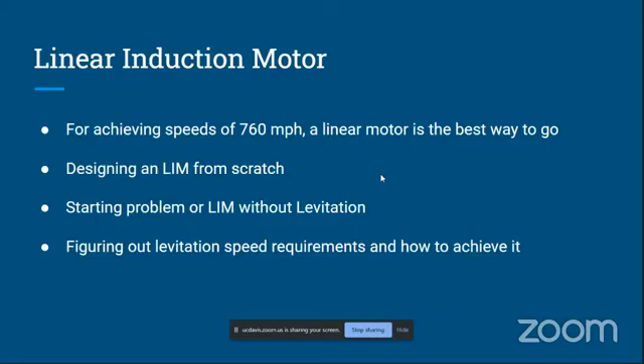The first issue we had to tackle was the levitation requirement for contactless propulsion. Our levitation system, which will be discussed, is designed to lift a pod of 400 kg at speeds slightly higher than 10 meters per second, that is 22 miles per hour. But to reach that speed, we have decided to use a LIM. We initially were working with the idea of double-sided LIMs, but eventually landed on single-sided LIMs for our first prototype.

We are using double-layer windings and three-phase high-voltage AC from a custom inverter, which should handle the high-voltage DC input of about 700 volts from the battery pack. It should also have high frequency to decrease the size of LIM needed to propel the pod. So mounting of the LIM on the chassis has to accommodate the complex wiring and the air gap requirements, and these details are being worked out in collaboration with the structures team.

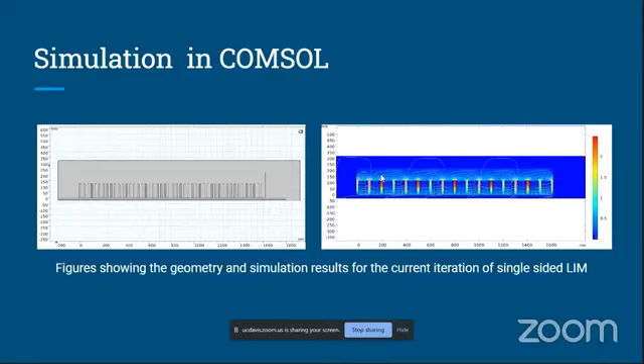Now, coming to the levitation system, which does the job of levitating the pod. This is an important step because this reduces the drag on the pod, which in turn can improve the speed. The system requirements of levitation are as follows. It should provide a stable levitation, that is, the air gap fluctuation should not be high. It should be cost-effective, fail-safe, and wear-resistant to minimize maintenance costs.

So, considering these points, we chose the permanent linear Halbach arrays to do this job. One of the main reasons is its passive nature. Hence, it's completely fail-safe, along with requiring zero power. Now, coming to the relation between levitation and propulsion. The vertical air gap variations would result in fluctuation of thrust by the LIM, hence these are to be minimized. The levitation system should have little drag and high lift-to-drag ratio at all speeds, so that the propulsion system need not waste power countering the drag.

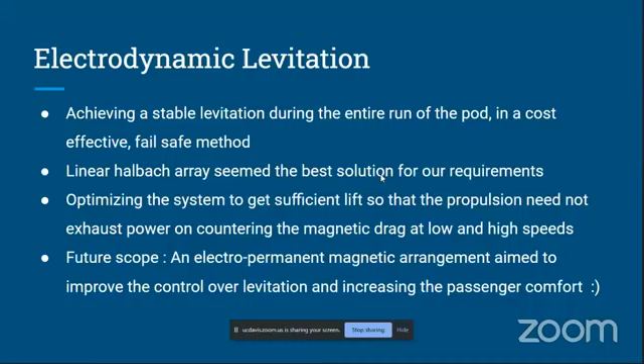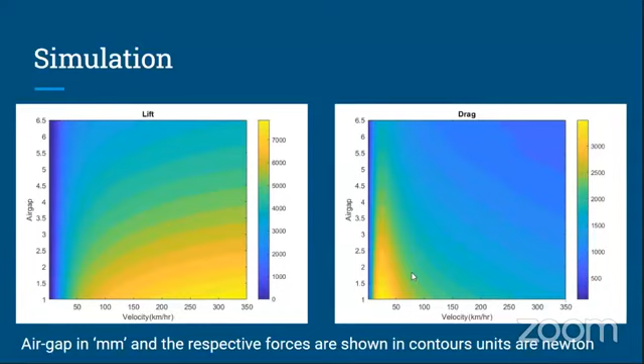Next up, we have electrical dependencies. So a complicated propulsion system like this requires a power system which is designed for safety, workability, as well as dependability. So the onboard power supply comes from an accumulator system of 15 packs with 13 LFP pouch cells in each. Thus, maximum voltage is 712 volt, and a DC-DC converter ensures stable 12 volt supply.

This powers the propulsion system as well as a control system which helps to communicate the pod state outside, as well as ensures that all the onboard computing gets all the sensor data properly. For electrical safety, which is a major priority, we use a shutdown circuit which is controlled by certain signals defined as system critical signals, and we have PCM-based cell cooling for all the cells.

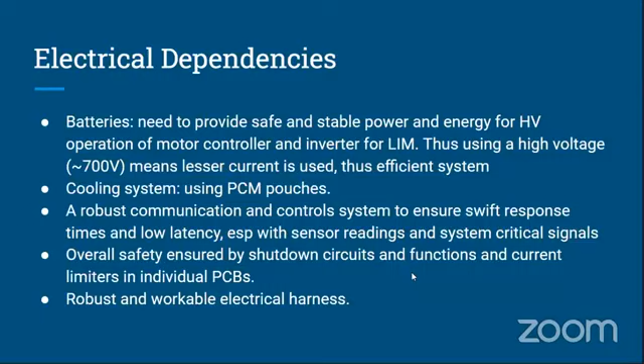Thus, this concludes a short insight into Hyperloop IITB's pod system, and thank you, and feel free to reach out if you're interested.

Okay, so would you like to continue presenting or would you like me to? Oh, go ahead. Take the floor. All right, awesome. Sounds good. I will share my screen. Okay. There you go. All right. There you go. Backwards. Okay. Can you all see my screen? Hello? Okay. Yeah, we can see it.

Awesome. So our three leads, Aaron, Jason, and Michael, unfortunately can't be here for the LIM. So I'm just going to go over how our LIM works. So in the past, we used cold gas thrusters, which is recommended by Elon Musk, and we did quite well. This year, however, we are planning on using a linear induction motor. They have been proven by maglev trains, which are used widely throughout the world, and they're likely the best option for a longer track. So while cold gas was a very good option for a shorter track, we're moving to a LIM this year.

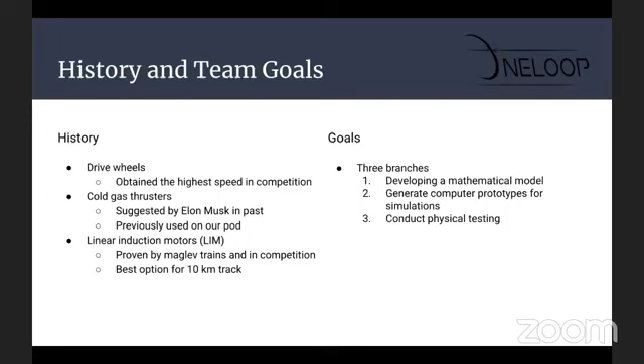So unfortunately, due to COVID, we can't really test in person, which is unfortunate because we need a test drive. So we're probably going to get to testing in around September when our new facility opens up. We will obviously have social distancing enforced. But right now, our main plan for the future is get some physical testing done.

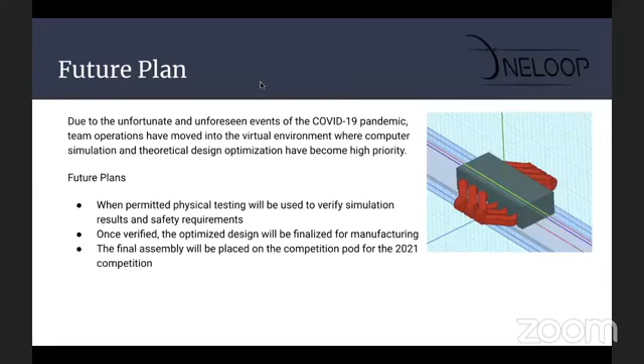So the way our LIM is working for now, and we're fairly certain we're going to stick with this plan, is we're probably going to use a DLIM. So it's a double-sided LIM. This allows for more lateral stability in the pod. We're also planning on using the LIM as brakes, possibly. We have a separate braking system, and we're considering possibly using the LIM in complementary fashion to the brakes, or possibly just as brakes on their own.

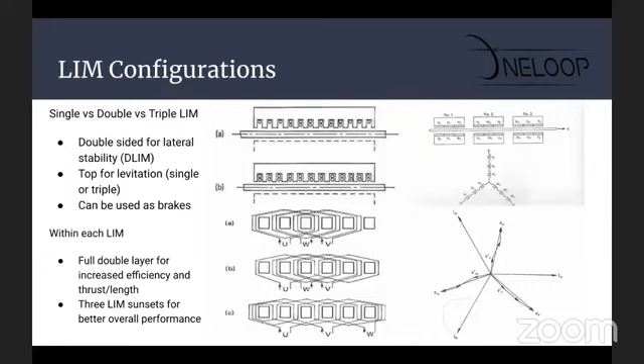Within each LIM, we have a full double layer, and we have 3 LIM subsets for better overall performance. Again, we're still working on the more technical details of the LIM, but in our simulations, this is what has come out as likely the best and most efficient system for our linear induction motor.

So we decided to use ANSYS for our simulations. This is because it's widely used among professionals and professors in the industry. And we have 3 main ways in which we're testing our LIM. We're using ANSYS, we're using mathematical models, and we're supposed to be using physical simulations, but we can't really meet in person. So we're really just using ANSYS and mathematical models at the moment.

If you attempt to use ANSYS at any point on your pod, we recommend testing the mesh to find an adequate level of accuracy and reducing difficult geometries. One of the biggest challenges we faced in ANSYS, other than the fairly steep learning curve, is that it tends to take a while to run.

And we as a team only really have our laptops. We're looking for high performance computing solutions, but right now we're still using laptops of our team members, and we have to compromise on the mesh. Obviously, we want to be as accurate as possible, but this can take up to over a day to run.

So the testing overview. Testing is probably the most interesting to those of you who are, well, unless you're very much interested in ANSYS like I am. But we have a lot of testing that we're planning on happening in the future, probably around September and later on. Then we have a test stand. We have a dynamic test stand which we're hoping to use. We've used it in the past.

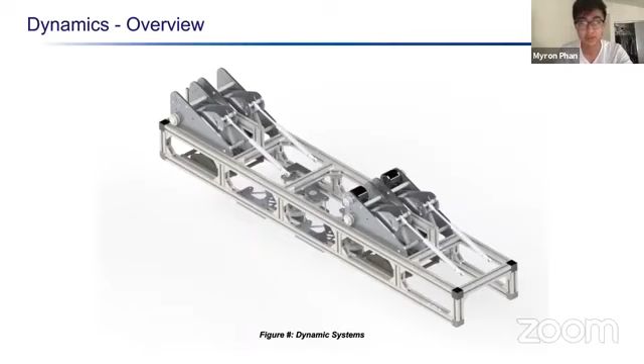So first, we'll be introducing a little bit of our propulsion. This year we decided to switch up to a gearbox design, which is a lot different than what we usually go for. We saw that most of the top teams usually went for either a LIM or a gearbox design of some sort. We felt that a gearbox design was more feasible at our scale. So that's what we decided to go for. And we will have DJ introduce that.

So just going over the layout of everything, in order to reduce costs, we ended up mirroring as many components as we could in the topside stabilization and the propulsion. So you can see this topside stabilization. We have 2 of those units and 2 propulsion units that go at the top of the flange of the I-beam. And then we have 4 underside units to go underneath the flange of the I-beam to clamp, and then 4 lateral stabilization units to keep the pod centered on the I-beam.

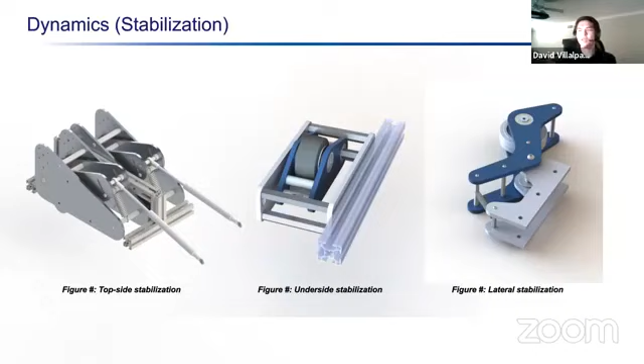And to go into detail with the propulsion, in order to keep it compact and costs within our budget, we're using a dual motor system with skateboard motors, 190 kV rating, and a pulley belt system in order to drive the drive wheel. We're also using tension springs as suspension and dual directional dampers.

The unit's intended to be mirrored to reduce the number of unique parts that need to be manufactured and just reduce our overall cost. And it's also meant to be modular, so this whole thing can be removed with about eight bolts. So that way we can easily maintain and adjust things, adjust pre-tensioning on things.

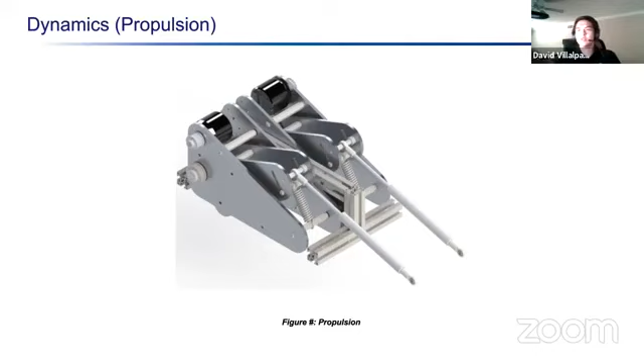As for performance, we haven't actually been able to get in the lab and manufacture due to current events, but our best estimates are that on the 20 meters of test track we have available, we can reach approximately 8.9 meters per second, which is about 20 miles per hour. So that's our propulsion system. Thank you.

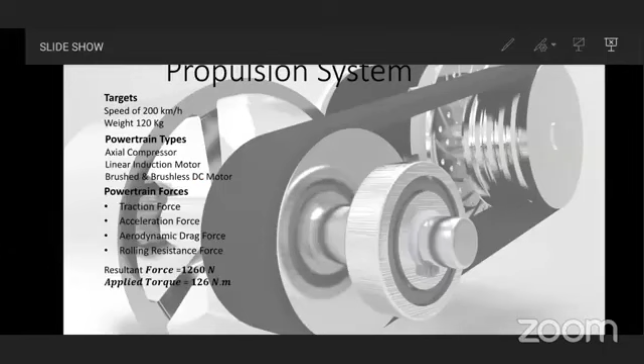Is it clear? Yep, hello? Is it clear? Yeah.

I'm Mohammed Hisham, propulsion system designer at Hyperloop. First, our targets for the year were a maximum speed of 200 km/h, and our weight to be 120 kilograms based on calculations of the whole team's systems weights.

In the selection, we had many choices: axial compressors, linear induction motors, or brushless DC motors.

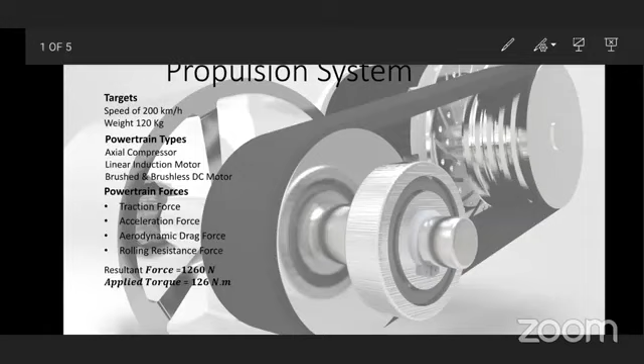For the powertrain forces, we calculated traction, acceleration, aerodynamic drag, and rolling resistance forces. The total force was 1,260 Newtons.

Depending on the considerations of the selection, including cost, lead time in the season, availability in our Egypt markets, and SpaceX competition rules, we selected the brushless DC motor with 82 kilowatts.

Our motor specs were 5,000 RPM and 140 Newton meters, and the transmission ratio was 1.2.

For our driveline selection, we considered cost, simplicity of the system, RPM and torque, and we selected a belt drive for the driveline.

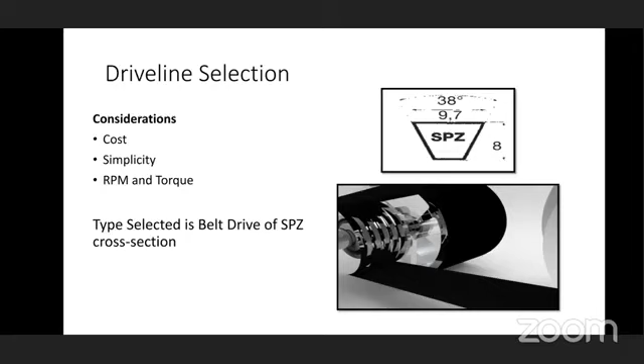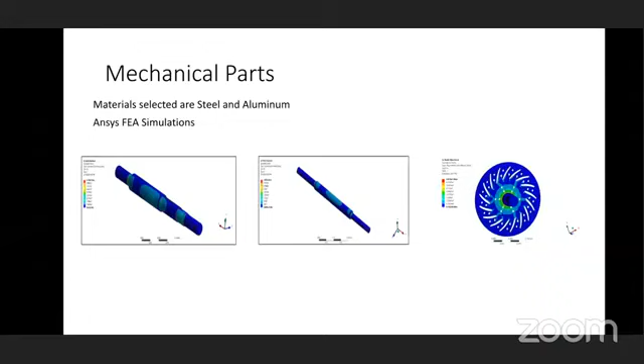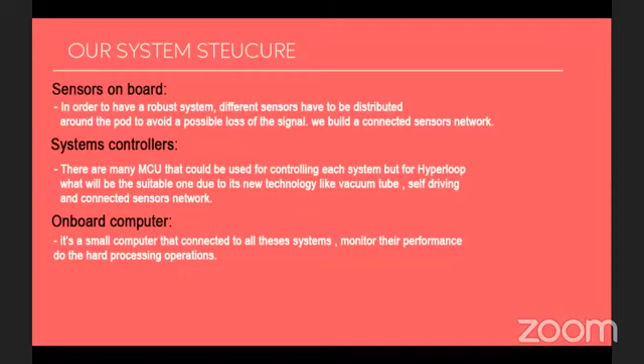Then system controllers, which are microcontrollers for each system to take sensor data and make actions based on it. Then our onboard computer acts as the brain of the pod, with all systems connected to it, monitoring their performance and interacting with them if any problem occurs.

Sensors on board measure important parameters like distance, temperature, and stability of the pod on the I-beam. All of these values will be measured.

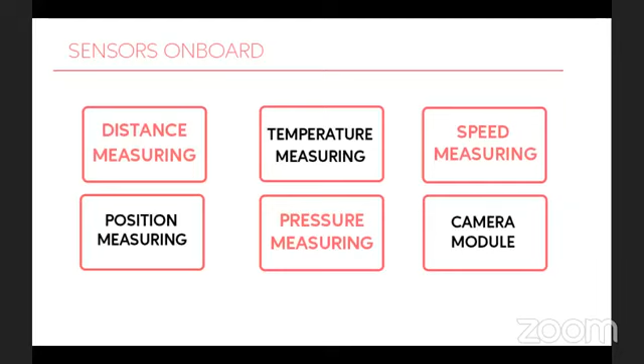System controllers: there is a controller for each system to manage and control it. For example, the navigation system measures the distance traveled by the pod in multiple ways, using an incremental rotary encoder and a fluorescent sensor, sending all this data to other systems to know the current state.

We will use Node MCU for its advantages, including an integrated ESP chip and support for the TCP/IP protocol, which we will see how we use next.

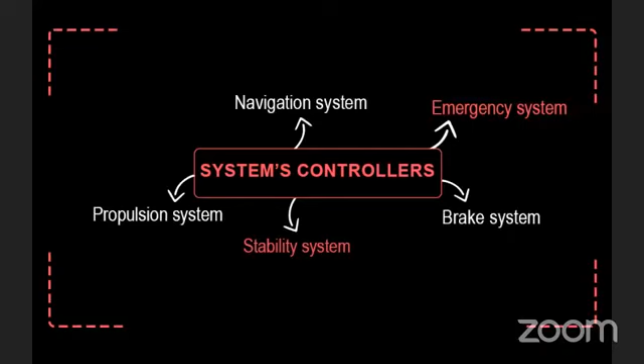Now we know how the systems work, but how will they communicate with each other? It's time for the M2M, or machine-to-machine, concept. It's the way that devices communicate with each other. M2M is divided into two main categories.

The first one is local M2M, where all devices are connected with each other locally. We build a local web server that connects to the system controllers over the MQTT protocol, which is a light protocol suitable for small data.

The MQTT protocol uses an MQTT broker, which acts as a virtual wallet to store data from all devices. All clients connected to the MQTT broker send data to it, it stores the data, and all systems could access the data at any time.

So we build our dashboard to display all system data, and also to interact with the pod through it manually if there is any problem.

For emergencies, we connected our critical system to an IoT platform, also to be on the safe side, and to communicate with our onboard computer, which is a Raspberry Pi, in remote desktop access mode using port forwarding.

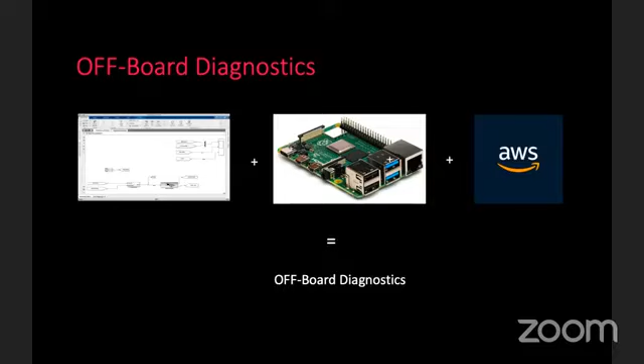This model runs in the cloud, and the Raspberry Pi takes all data input and output from the real environment and sends it to the cloud, which runs the model for our pod, compares the data from the physical asset to the data from the model, and makes decisions based on this data.

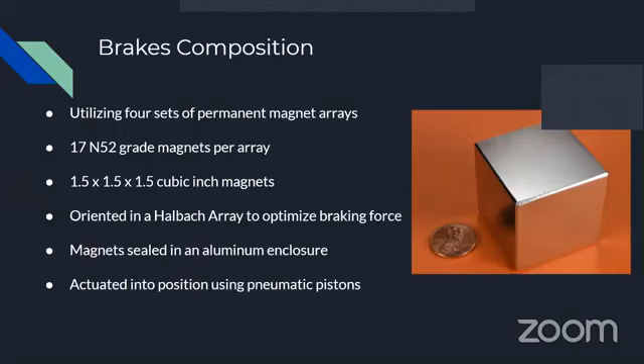Magnetic braking works by inducing a force called eddy currents, and eddy currents are formed when a magnet is translated horizontally against a paramagnetic metal, such as aluminum. These magnets must also be very close to the metal, since force drops with the square of the distance to the beam.

When drafting ideas for where to brake, there were 2 viable options: you could either brake on the top of the I-beam or brake on the sides of the I-beam. The original plan was to brake on the top because the stability system allowed us to actuate our arrays closer to the beam than on the sides, which in turn would allow the arrays to generate more braking force.

However, through simulations on ANSYS Maxwell, it was discovered that the arrays interact with each other positively if placed on the sides. This interaction allowed one array to produce about twice as much force with the aid of the other array versus by itself. So pretty much each set of arrays could produce up to 4 times as much braking force.

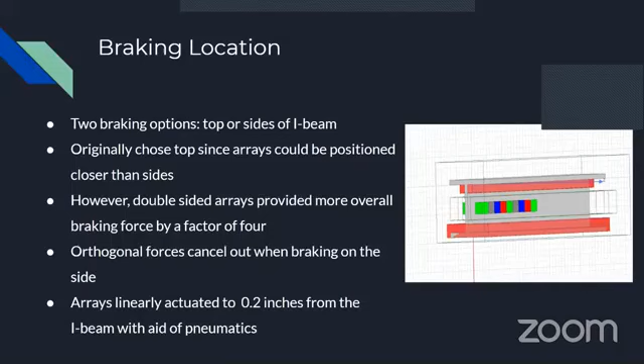So permanent magnetic braking provided the most advantages over other different forms of braking. Braking on a brake disc, similar to how cars brake, is not very feasible with the velocity due to the heat buildup. The discs would actually heat up to the point that they would physically melt, compromising the entire braking system. Friction braking on the I-beam is also inherently risky because of the discontinuities of the track segments, and we don't want to take those chances of accidentally tearing a piece of the pod off.

We also considered using electromagnets, but they have more sources of failure when compared to permanent magnets. They also require a lot of power, which requires a lot more weight. Permanent magnets also do not build up a significant amount of heat, do not require physical contact with the track, and only need power to actuate them into position.

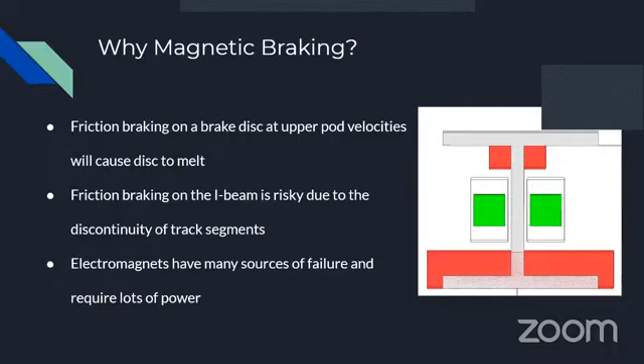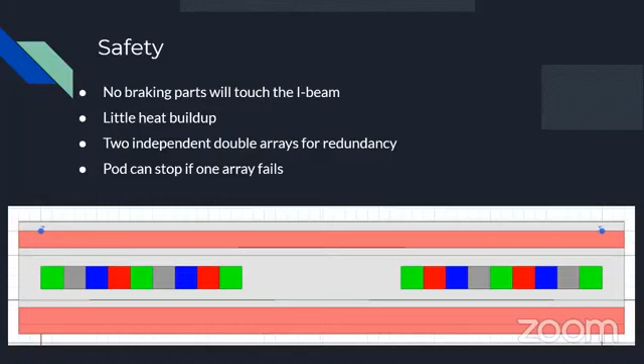So this leads us to the safety of the braking system. As I previously mentioned, the magnets will not touch the I-beam at all. And in fact, no piece of the braking system will ever touch the I-beam in the run. Heat buildup is also not going to be an issue with the brakes because we won't be in contact with the I-beam. Also, to ensure that the pod comes to a safe and reliable stop, 2 independent double arrays will be set up, one in front, one in the back, like I mentioned. And each single double array will be able to stop the pod by itself without the aid of the other.

So data collection for this year has been made much more complex due to COVID-19. Under normal circumstances, the brakes team would be divided into 2 smaller teams, with one team conducting computer simulations and the other team verifying those simulations with physical test data. However, we had to suspend the collection of physical data in March due to the coronavirus. So the team has been performing simulations using the software ANSYS Maxwell. With ANSYS Maxwell, a model of the I-beam was made, so factors such as magnet layout, grade, quantity, and distance from the I-beam could be optimized.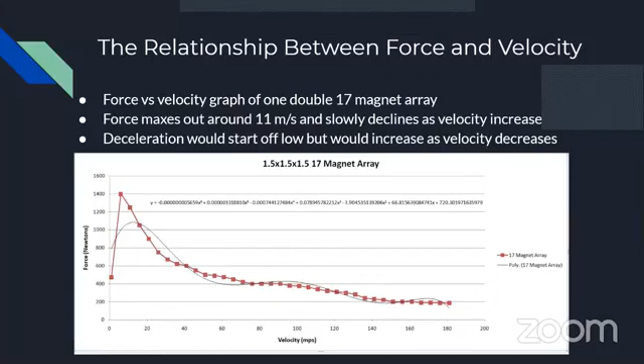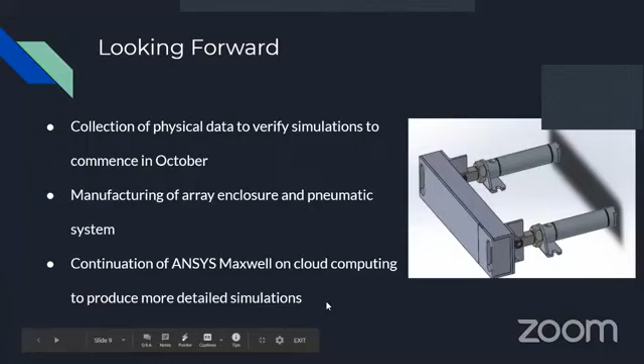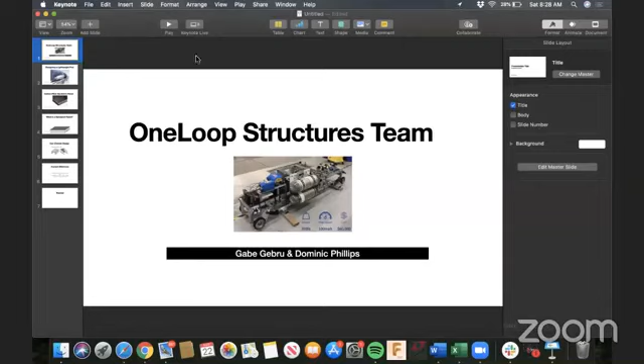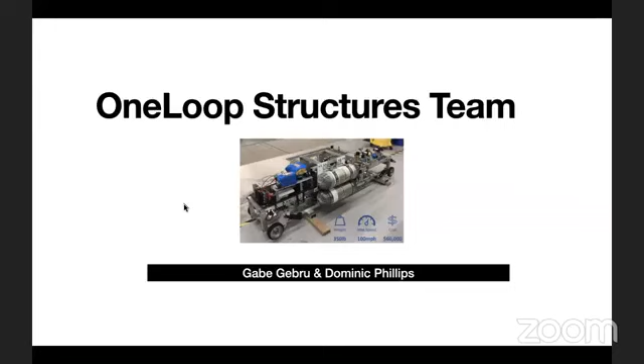All right, time for structures from OneLoop. Gabe, you here? Hi. Give me 1 second. Let me share my screen. All right, so I will be presenting on behalf of Dominic and myself, the other structures co-lead. So let me go ahead and get started.

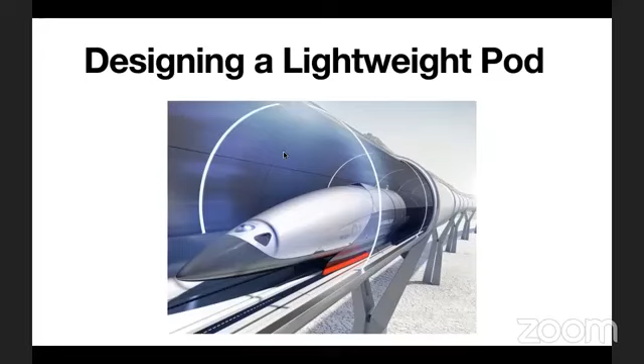So our primary goal was to design a lightweight chassis, and in doing so, that would hopefully increase the speed of our overall pod when it's traveling through the tube. To do that, we decided to use carbon fiber sandwich panels. Basically, this is a couple of carbon fiber sheets, and we use some epoxy to cure that to a core structure. The core structure is a lot lighter weight. This gives a strong overall structure, being the sandwich panel itself, while maintaining a lightweight structure at the same time.

The maximum stresses almost always occur at the surface of the structure, so having that lightweight core really doesn't affect our ability to withstand these kinds of stresses. A sandwich panel can be made with carbon fiber and a lightweight foam core. We will be using carbon fiber with an end grain balsa wood. As of right now, that's what we're going to be going with.

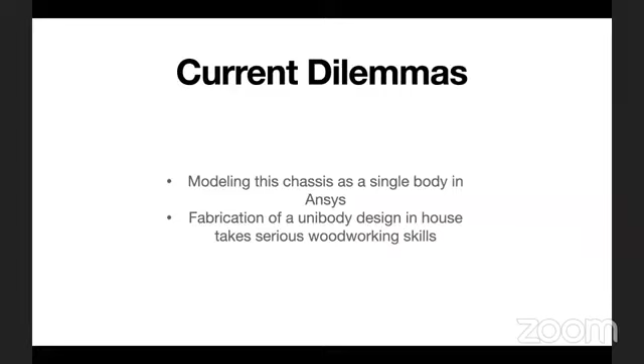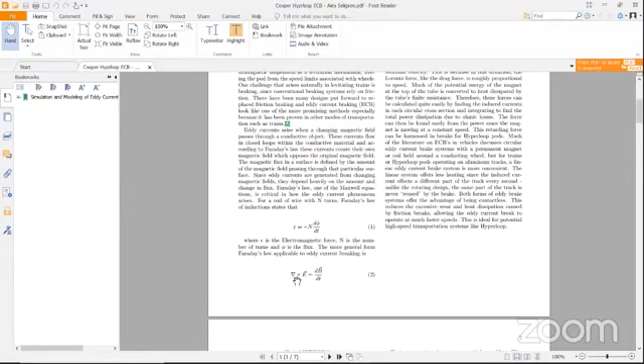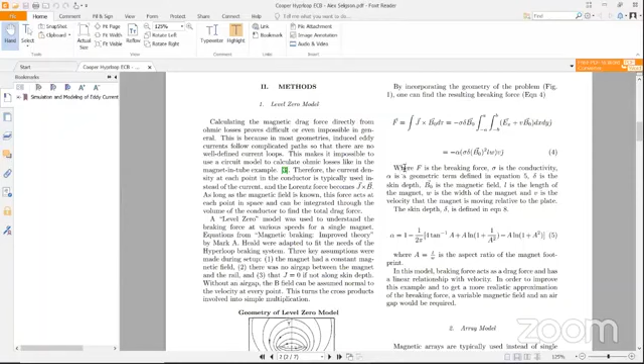And so we took this equation and we wanted to look at how a lot of simulation packages deal with eddy brakes. So we started with this level 0 model, and we have this geometry of a magnet passing by a conductive material, and we started with these 3 key assumptions: the magnet had a constant magnetic field, there was no air gap between the magnet and the rail, and J equals 0 if not along the skin depth. And then with those 3 assumptions, we were able to find this simplified expression for the force here. And the results of this can be found later in the paper.

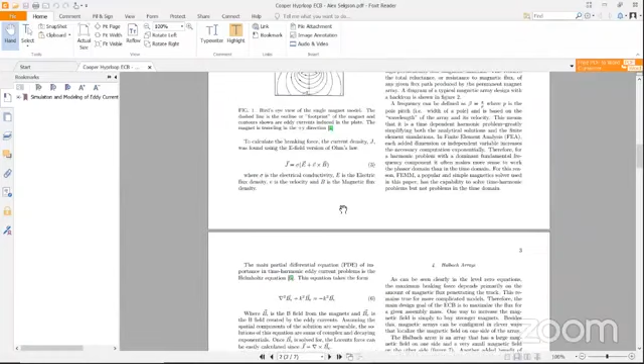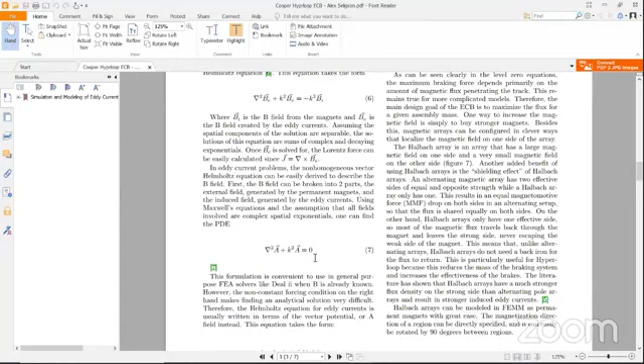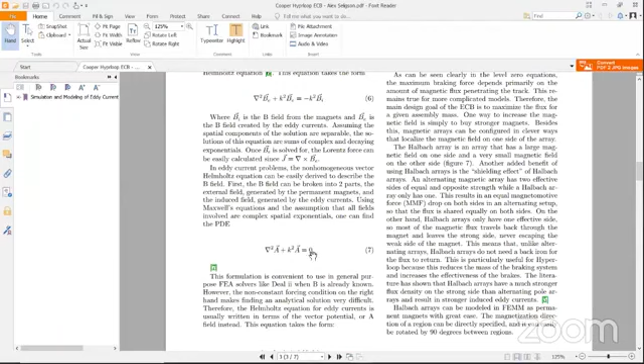So we move on to see that a lot of finite element analysis actually uses these PDE solvers to be able to solve eddy current simulations, and the equations that they use are here, and then in a magnetic vector potential version that is here. So these are Helmholtz equations, and they're very solvable and known. So it's very nice that programs such as Deal ii, which is an option that we looked at, and I think FEMM, use this equation in the background. So it was nice to be able to find this.

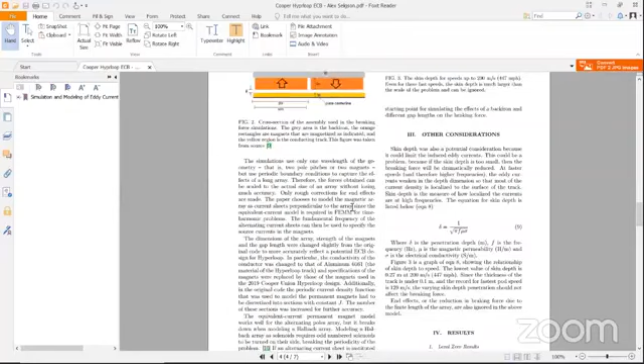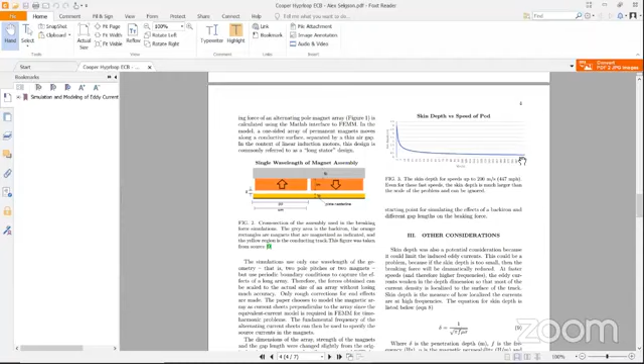So yeah, here is a result. One of the considerations we had was the skin depth and how skin depth changes with the velocity of the pod. But even at 200 meters per second, the skin depth is about 0.22 meters, and that's much larger than anything that we will be dealing with in terms of braking. And here's the results of the level 0 model.

And then here we have a result of braking force with and without back iron. Back iron is just a material that allows the magnetic flux to return back to a braking system. And with back iron, you can see the force is almost doubled. It's interesting because another option we were considering was Halbach arrays, which is just a configuration of magnets that increases the magnetic flux on one side while eliminating it on the other, basically.

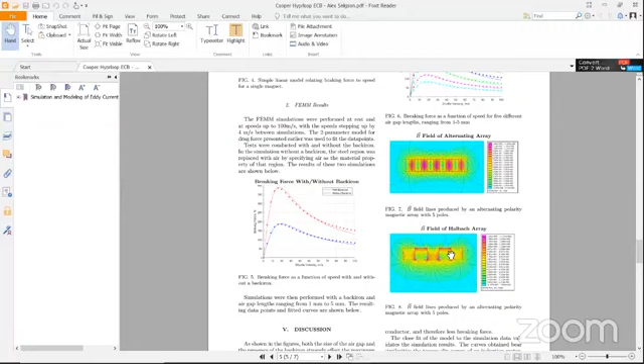This is the simulation of the Halbach array magnetic field versus a normal array of magnets. And as you can see, there's much more flux on this side than this side. And what's beneficial about that is that not only is there more flux on this side, but you don't need a back iron to be able to bring the flux back into the brakes, because the Halbach array has its own shielding effect, as they call it, that will bring it back into the working side.

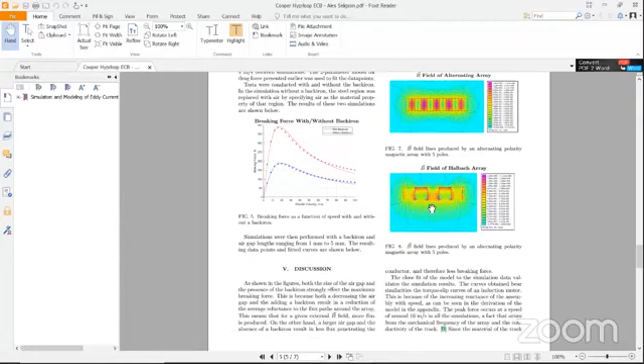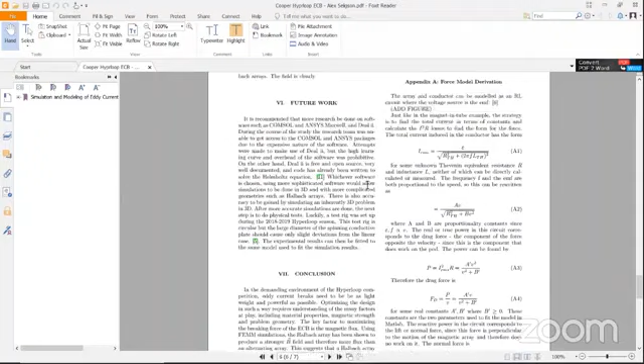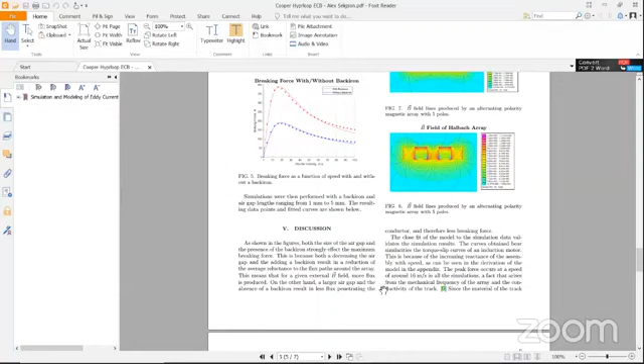And here we have some derivations and conclusions. And yeah, we plan on looking more into Deal ii and ANSYS and COMSOL, and we're going to see which option is going to be the best for the future of our Hyperloop braking system. That'll be it.

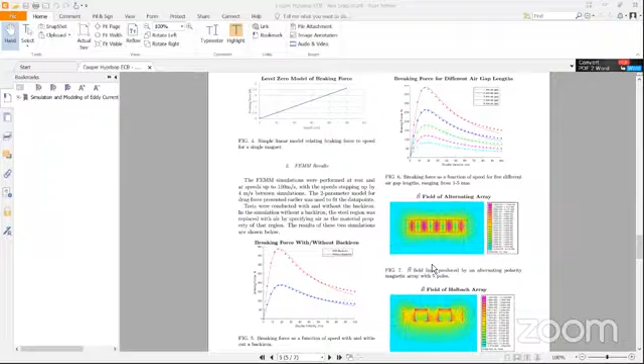Awesome. Thank you so much to Dan and the team at Cooper Union for their work on this topic and on braking. Next up, we're going to have HyperXite from UC Irvine. That's going to be presenting on their braking and structures work. HyperXite, you have the floor.

Okay, let me share my screen. Oh my gosh.

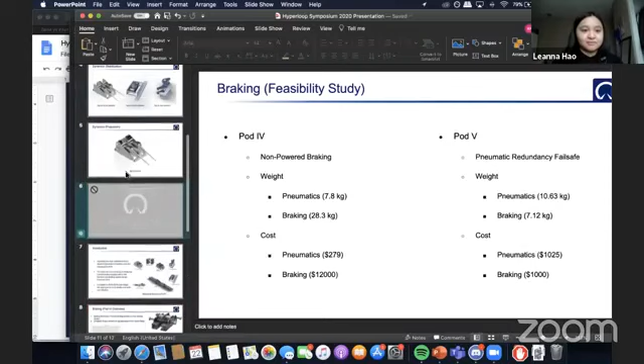Okay. Hi everyone, my name is Mahek. I'm the project manager for HyperXite. And my name is Leanna. I am the braking lead for HyperXite. And I'm Karan Patel. I'm the lead piping and cooling engineer on HyperXite.

Okay, let's get started. Okay, so as Mahek introduced our team, we've been a team since 2015, and I just wanted to highlight that the systems that we'll be talking about are the braking assembly and the pneumatic assembly in the top left and bottom left of the figure on the right. Next slide.

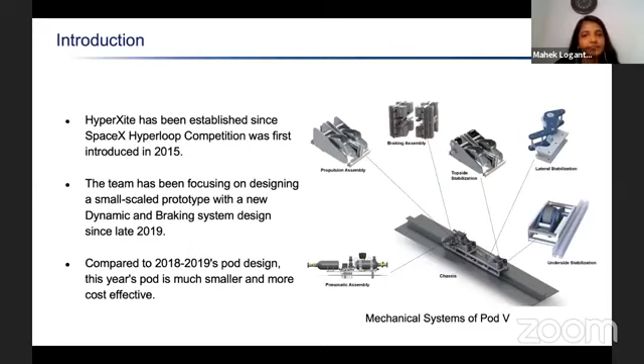Okay, so I'll be going over the reasons why we made our changes to the pod. So as Mahek has said before, we're actually moving down to a smaller scale pod for a more R&D year. So for pod 4, the braking mechanism was a permanent magnet eddy current braking system with 2 Halbach arrays oriented on either sides of the I-beam flange.

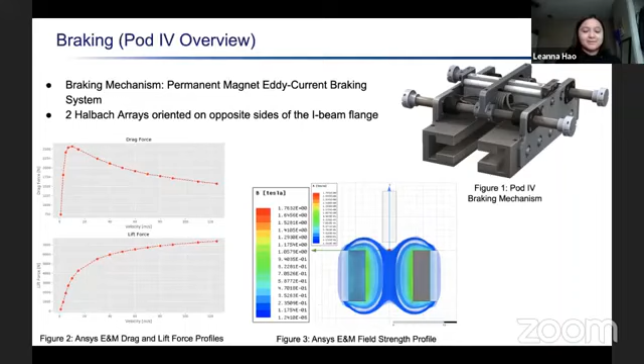So it's no contact. As you can see, we did some ANSYS E&M field strength profiles just to make sure that we don't have badly oriented magnetic profiles. And then you can see our lift and drag profiles, and our highest drag was about 2,700 newtons of braking force.

So for pod 5, we're actually moving to a pneumatically actuated friction braking system with a maximum braking force of about 1,574. So if you look at figure 1, that's the entire braking mechanism, which can then be broken down into, as you can see from figure 2, 4 braking sub-assemblies, which all clamp onto the I-beam.

So since this is contact braking, there's more of a concern about the stresses and the forces going through the braking system. So we've done some analysis in ANSYS specifically on our brake pad plate, which is the part that would be clamping onto the I-beam. So as you can see from figure 3, that's our simulation.

And then we also did some hand calcs, as you can see from the second figure 2 in the bottom left-hand corner. But we have a minimum structural factor of safety of 6.4, which is much higher than SpaceX's requirement of a minimum structural factor of safety of 2. And our stopping rate is about 2.95 Gs.

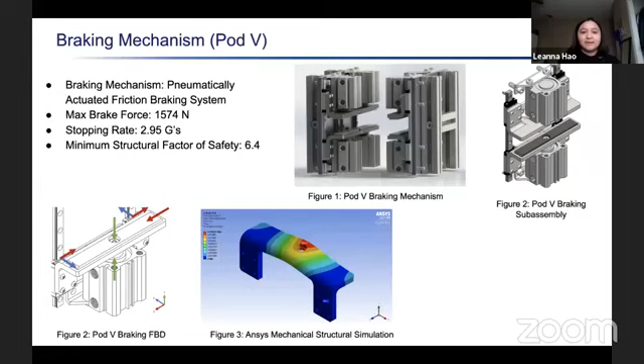So within the scope of the braking system, since we are using double acting actuators, the purpose of our pneumatic system is to provide air pressure to the actuators to engage and disengage those brakes. But alongside that, our pneumatic system also builds in a redundancy that automatically engages our brakes in case our pod loses power for any reason.

And we have to make sure that in the event that there's a power loss for whatever reason to the pod, that the pod stops. And so the 5-2 solenoid valve will be programmed in a way that the brakes will be engaged when the pod is off. Next slide.

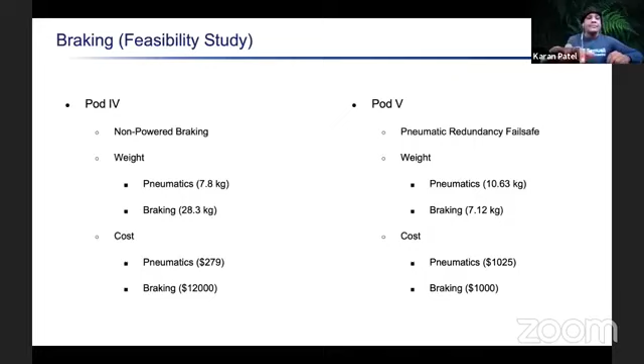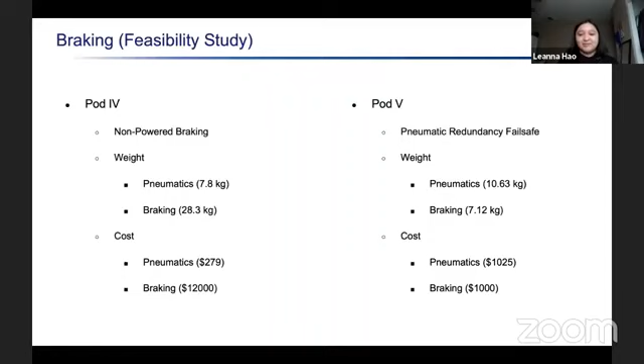So we moved down as we moved to a friction braking system, and we focused on more off-the-shelf parts and more on designing around what we have. We went down to about 1,000 for braking and about 1,000 for pneumatics. So in conclusion, when comparing the two, pod 4 costs about $4.50 per 1 Newton of braking force, while pod 5 is only $1.29, which is significantly cheaper for us, especially since we're talking about a more R&D year.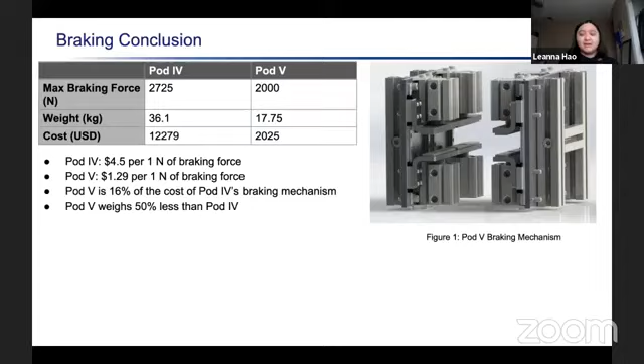And then we've also cut down significantly on the weight. Pod 5, our pneumatic and braking system together, is about 50% the weight and 16% the cost of pod 4's braking system. So in terms of thinking about what's good for the team and what's good for our actual design, a pneumatic friction braking system was best for us. And that's it.

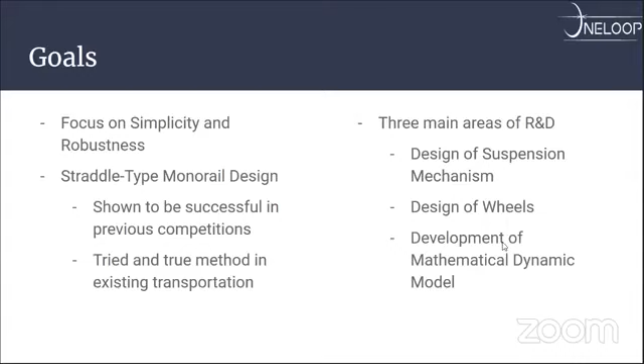So we split our system into 3 main areas of research and development. The first one is the design of the actual suspension mechanism, the design and analysis of the wheels, and also the development of a mathematical dynamic model of our stability system. So here you can see a simple concept of our stability system, the monorail design. Keeping with our goal of simplicity and robustness, we decided to go with a simple force magnification linkage connecting the wheel and the chassis.

The main part of this design is researching what types of shocks we're going to use. First off, we decided to go with mountain bike shocks. There's the choice of using either coilovers or air shocks. The traditional coilovers are very reliable. They've been used for many years, and they're very responsive. They also have a linear spring rate; it's where Hooke's law for springs comes from. But some of the downsides are that the springs are made of metal, so they're heavy, and they're hard to adjust because the metal springs have just one spring value.

The other option is to use air shocks. Air shocks are much lighter, they're very adjustable, and they also have a progressive spring rate, which in our case is actually very useful. However, with this being Hyperloop, we don't know how it might behave in a vacuum since it is powered by air pressure. So further research needs to be done to determine exactly what geometry to use for our linkage mechanism, the spring constants, and how the shock behaves.

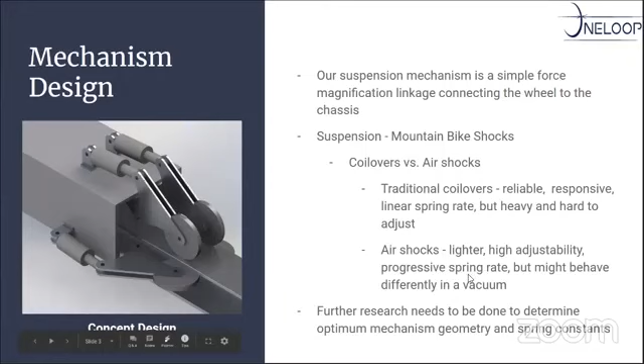So for the wheels, since our structures team that presented earlier was going to use carbon fiber, we decided to also utilize that carbon fiber to manufacture our wheels. So our wheels are going to be manufactured in-house using a carbon fiber composite. And that cuts down a lot on the wheel's weight, which means we don't have to worry about the size of the wheel affecting the pod's weight too much.

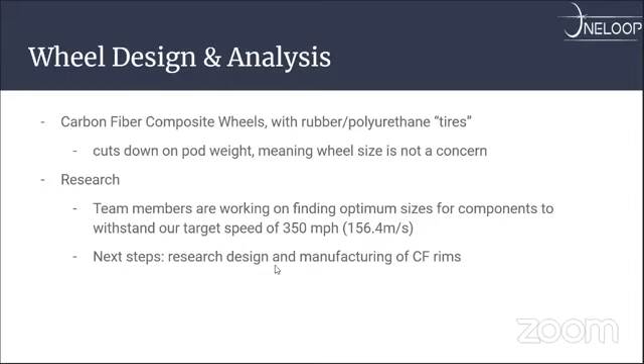To maintain contact with the track, we're opting to use either rubber or polyurethane tires to both maintain friction with the track and also add a little bit of spring deformation to deal with variations in the track. So for our research, we're looking at properly sizing all of our components, such as bearings, wheel diameter, and shaft size to get our target speed of 350 miles per hour. And our next step is to research the actual design and manufacturing of the carbon fiber.

Our third point of research is to come up with a sort of analytical mathematical model of the dynamics of our pod. So what we've done so far is we've split it up into a vertical stability simulation and a lateral stability simulation. So the vertical stability is based off of a traditional half-car pitch heave model. And we calculated that using the bond graph method. And we simulated it in MATLAB, which gives us some preliminary

values for displacement. And the reason these simulations are so useful is because as our pod continues to develop and iterate, we can easily change all of our parameters in our simulations to update our suspension accordingly. So the lateral stability model is currently in development, but we're running into some trouble with that right now because there's not that much documentation that you can find online in research papers about the lateral stability.

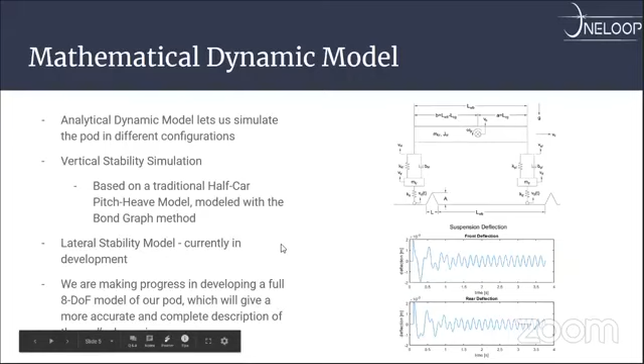However, we are making a lot of progress in developing a full 8 degree of freedom model, which is using a different method than what we were using before. And this method we found is actually a whole lot easier. It's using Lagrange mechanics, which is a lot easier, and it will give us a more accurate and complete description of the dynamics of our pod. And yeah, so that is our stability system.